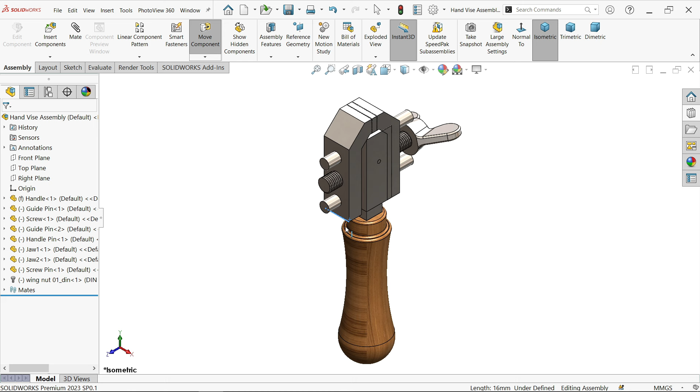Today we are going to create a simple hand vise in SolidWorks. We will create each and every part and assemble at the end. So let's see how to make this simple exercise in SolidWorks. Hand vise assembly, a new exercise in SolidWorks. Here we will create each and every part and assemble at the end.

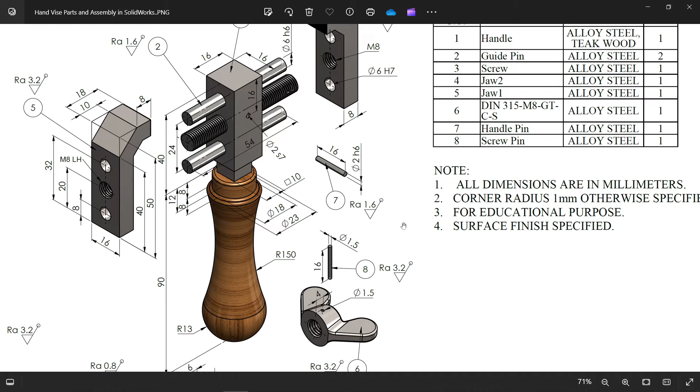Now we have a 3D or isometric view. First let me check: note all dimensions are in millimeter, corner radius 1 millimeter unless otherwise specified. Now check the table. We have 8 parts. Part 1 is alloy steel and teak wood, 1 number. Which one is part 1? This is part 1, the handle.

See the upper part, 16 by 16, and the height here is 40 millimeter. Then at the bottom a 10 square. This depth goes inside up to 12 millimeter. Then there is one hole at the center, 16 millimeter, 2 dia.

Let's make a 6 dia hole here, a 6 dia hole on this one also, and the middle one is a screw, M8. And you will see the distance of the holes from here also, because these jaws are going to clamp with 8, 20, 32 at center.

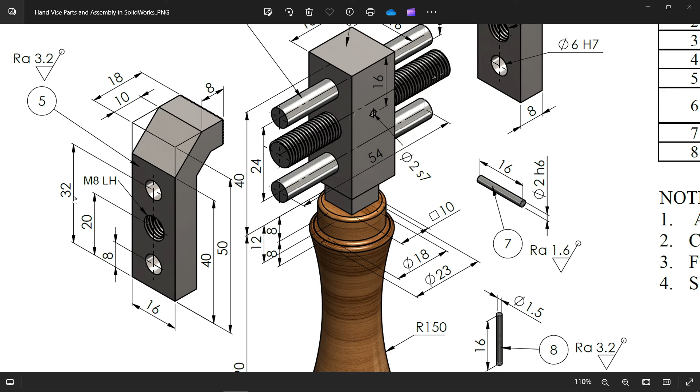So first I am going to create the first part: top plane, sketch. Activate center rectangle and draw 16, tab, 16, enter, right click, exit. Extrude, make the end condition blind and depth 40 millimeter. Make it reverse direction, change direction.

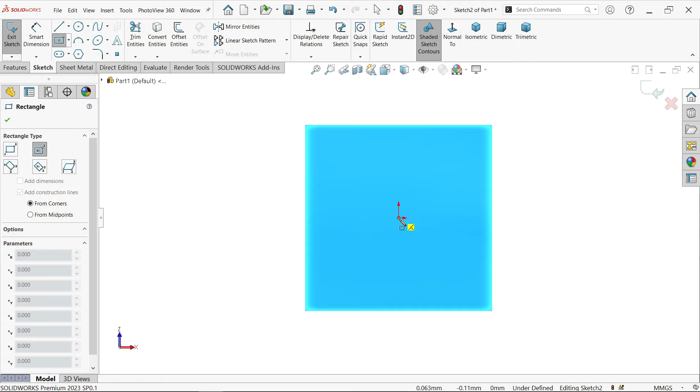Now select the bottom face, sketch, again activate center rectangle. Make 10, tab, 10, enter, right click, exit. This is a fully defined sketch. Go to features and activate extruded boss base. The start condition is the same because this extrudes from one plane. End condition for direction 1 is blind, and depth according to the drawing is 12 millimeter. Here we have 3 holes.

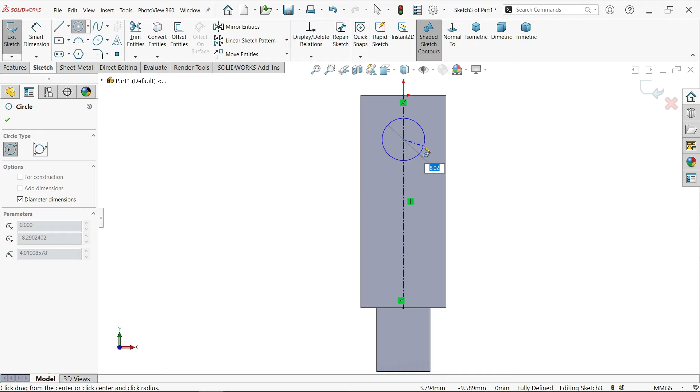Sketch. Let me activate a center line, right click, select and exit. Now let's make the holes. The first hole is going to be 6, and this one is going to be 8, right click, exit.

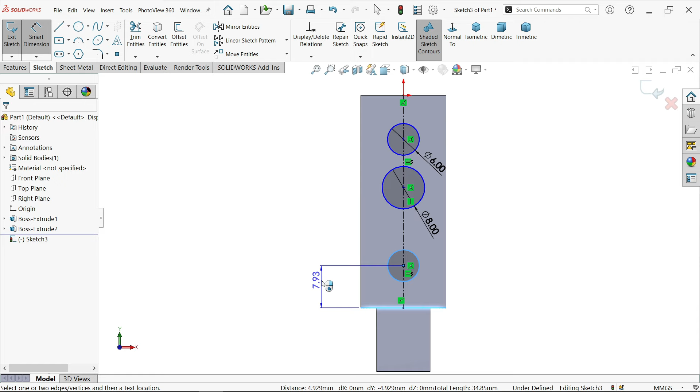Select these two as equal, smart dimension. Let's define one by one from this edge: 8 millimeter, the second one 20 millimeter, and the third one 32 millimeter, as given in the drawing. Select extruded cut, end condition through all, and the arrow points in the right direction.

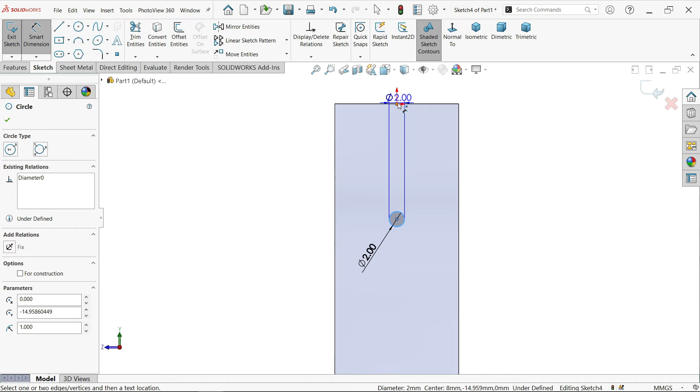Select this face, sketch, and make a 2 dia circle at center, smart dimension, 16 millimeter. I'm going a little fast. This is still not defined, so select the origin point, hold shift and select this center point, and you will see the vertical pop up. Extruded cut, end condition through all, and the arrow points in the right direction.

Now let's make the handle. Handle length is 90 millimeter. This curve is R150, another curve R13, outer diameter 23, inner diameter 18. Overall length 90 millimeter, and from here to here 8 millimeter, and from here to here also 8 millimeter.

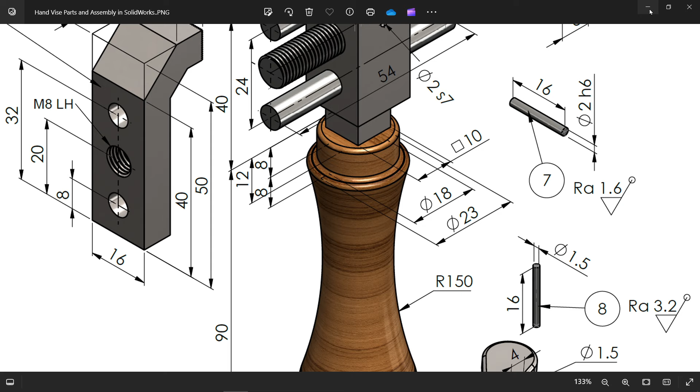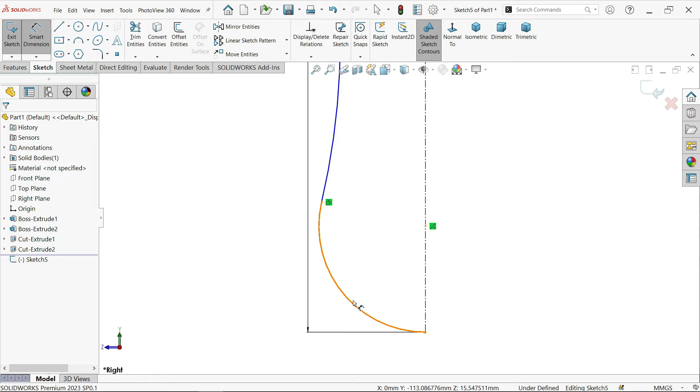Which plane? Right plane. Sketch, start from here and make this line 90, enter, right click, exit. Start somewhere here, exit. Now let's define a 3-point arc, again another 3-point arc, exit. Make this point tangent, smart dimension, this is 13 and this is 150.

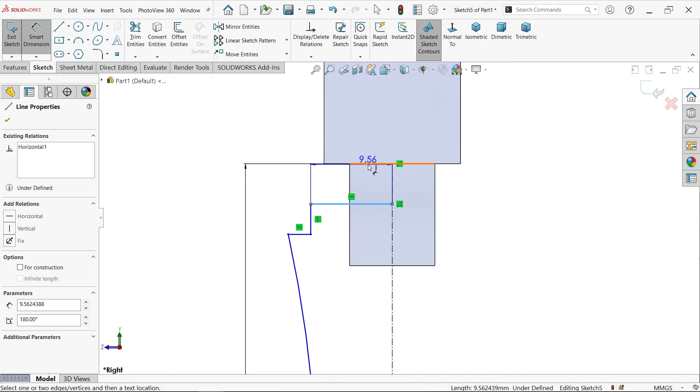Let's check what else we can do. Smart dimension, distance from here to here is 8 millimeter, and again 8 millimeter. The diameter is given as 18 millimeter and this one 23. Now we have a fully defined sketch.

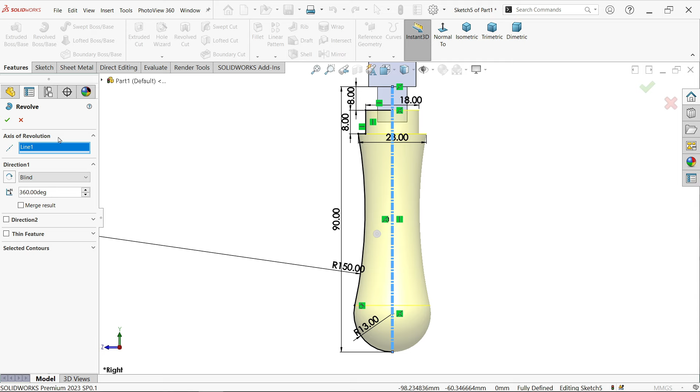Activate revolve boss base. Due to this construction line it is open geometry, so the system asks if the sketch should be closed automatically. Say yes. By default the system took the center line as the axis of revolution, 360 degrees. Unmerge result. Now fillet, constant type, 1 millimeter radius, selecting this face and this edge.

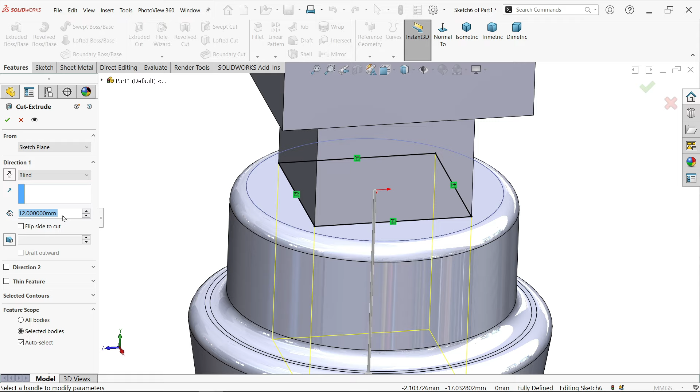Select this face, sketch, extruded boss base, select this one, convert entity. Now I want an extrude cut, not through all, depth only 4 millimeter, because the length is 12 millimeter and from here to this face is 8, so only 4 millimeter remaining.

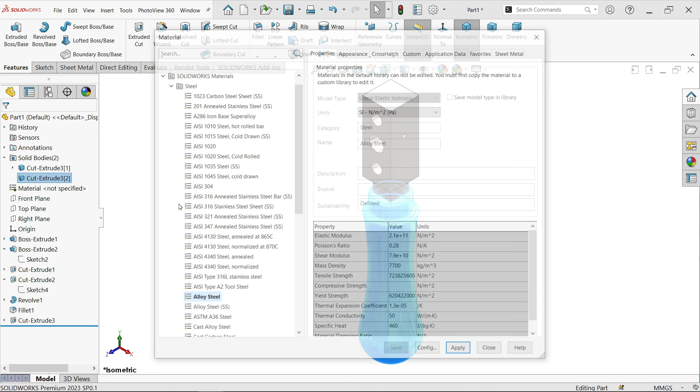Let's hide this part and see. Right click, show. This is the first part: right click, material, edit material, alloy steel, apply, close. The second one: right click, material, edit material, wood, teak, apply, close.

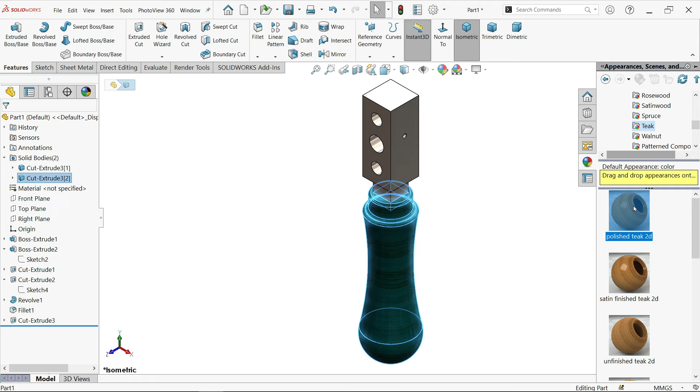You can edit the appearance from here: organic, wood, teak. There are many materials here, you can use polished teak. Now let's save this one. Desktop, save, hand vise. There is already one.

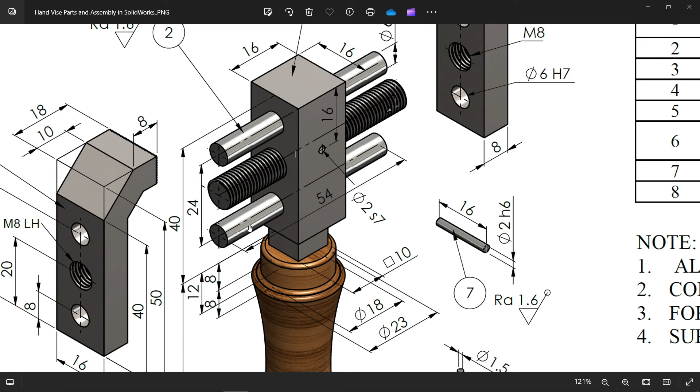This is part 1, handle. Save. Let's make the next part, guide pin, part number 2, and this is the part number 2. There are 2 pins. You will see guide pin, alloy steel, length 54 millimeter, see, diameter 6, fit H6. Okay.

Now front plane sketch, activate circle, 6, enter. Now select this dimension and here in tolerance choose fit. Now this is going to shaft here, so drop down and here choose shaft fitting, F6. Now this decimal, let's say 0. See here, fitting like press fit.

Okay, extrude. Now here make 54, but make it mid plane, so it makes it easy during assembly. Now right click on unspecified material, edit material, alloy steel, apply, close, save. Now this is part 2, guide pin.

Now let's make the third part, screw. Screw we need 1. Now this is the screw, and this screw detail you will observe here. This upper Ra, this is the surface finish. Okay. Now length 60, M8 means outer diameter we will keep M8, but here there is a catch. There is one groove, 2 diameter, then there is one hole at 6 millimeter here. This is machine thread M8 left hand side, and this one only M8 means right hand side. Okay, so these two are different.

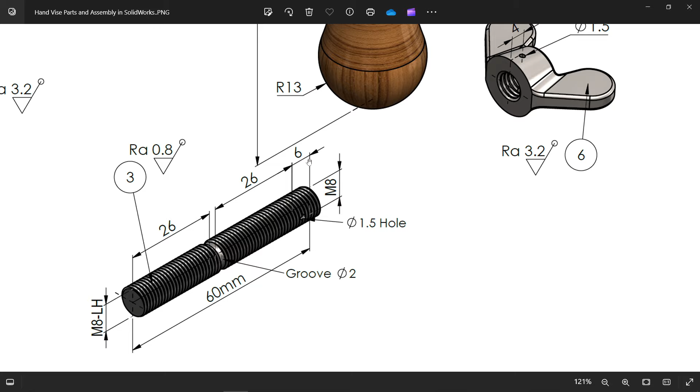So let's do this. This is 26, this center one 2 millimeter groove, then 26 up to hole, then there is a 6 millimeter. Now front plane sketch, circle. Now let's make this one 8, extruded boss base, and make mid plane, and length let's say 60. Okay.

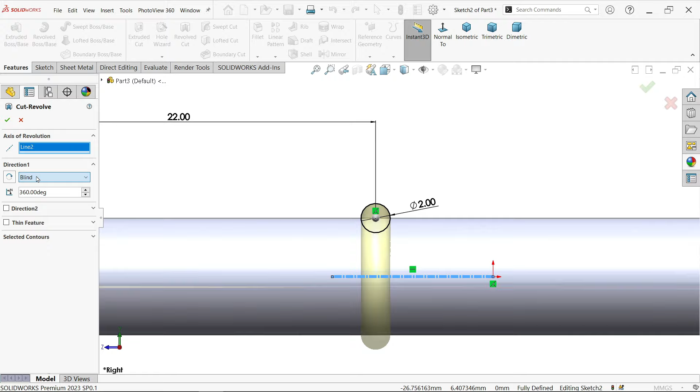Right plane sketch, let me select circle, make this diameter 2, smart dimension 22. Okay. Now select the upper line and this one, coincident. See, activate here revolve cut. Now see, this center line is detected by the system as the axis of revolution. Keep end condition blind and angle 360 degree, because I want to cut the complete 360 degrees.

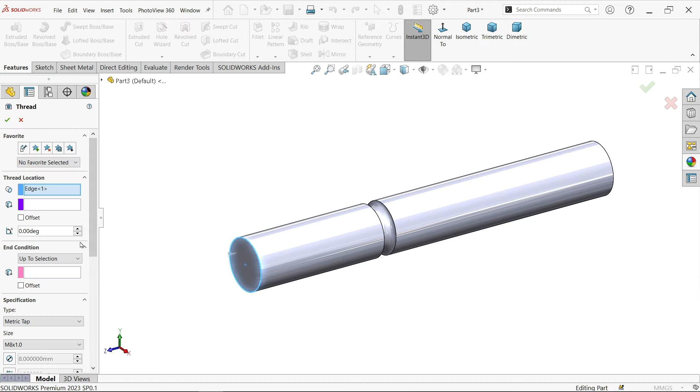See here. Now, okay, the hole we will make later. Let's add here thread. Okay. Now let me select this face, edge and face. The thread is going to start from here. Okay, up to selection. Now up to selection means let's say this edge. Okay, you will see the preview. Now I'm going to use offset, a little, 1 millimeter here, so the edges will be, it seems perfect, but see there is a little outside thread going.

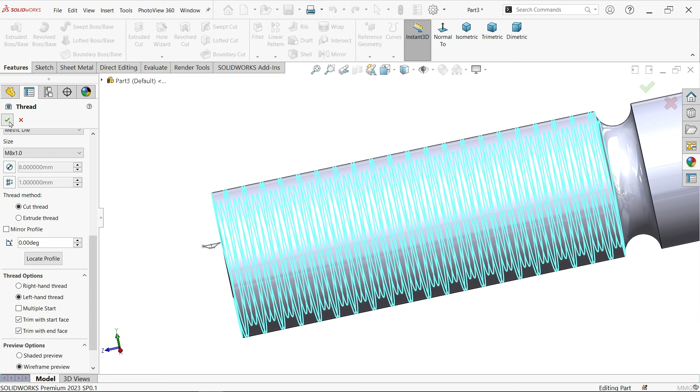Now one more thing, here I want to cut thread, so choose here metric die. See, this is going to cut thread, this side left hand. Okay, now here choose trim with start face, so see, this is trimmed with end face. See here, this is also trimmed. Okay. See. Similarly, I am going to do this for this end thread.

Okay. Edge, let's say this one. Select face. Now up to, I am going to select this edge. Now everything is same. I am going to define offset 1 millimeter. Reverse. Keep a little outside, then trim it. That's the better way. Metric die M8x1. Now this side I am going to make a right hand thread. Trim with start face, trim with end face. Means at the boundary the thread is going to trim. See.

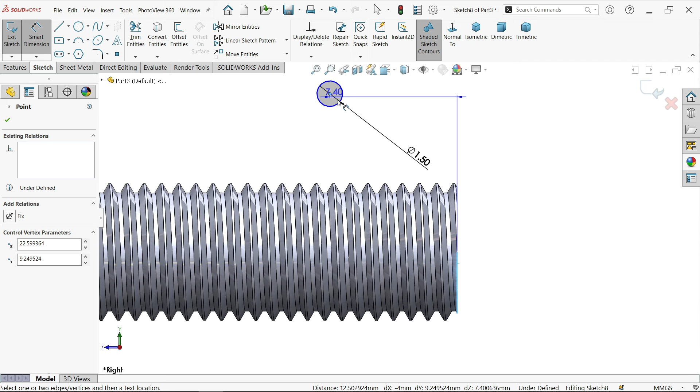Right click, sketch, activate circle, 1.5, enter, exit. Now let me select this edge, 6. Okay. Okay, we need to cut. So select this origin point, hold shift key, select this center point, make horizontal. Look, it seems a fully defined sketch. Now here choose extruded cut, through all, both. Okay. Now see, the hole is created. The pin is going to go here.

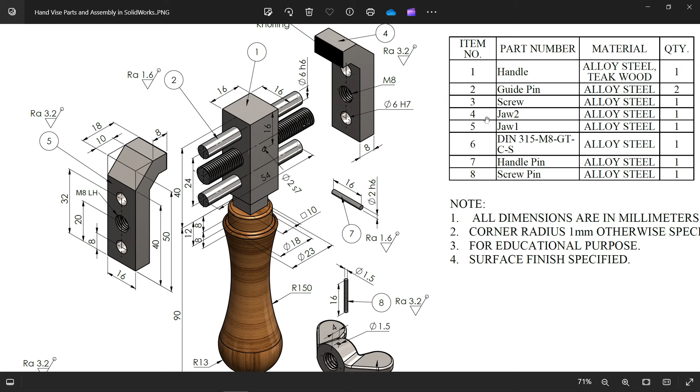Now material, same alloy steel, edit material, apply, close. Third part is screw. Now jaw 2, jaw 1. This is jaw 2, jaw 1. Okay, the hole and everything is same, just we saved it with 2 names. Okay, only difference is in jaw 2. Okay, first we will create jaw 1, then jaw 2.

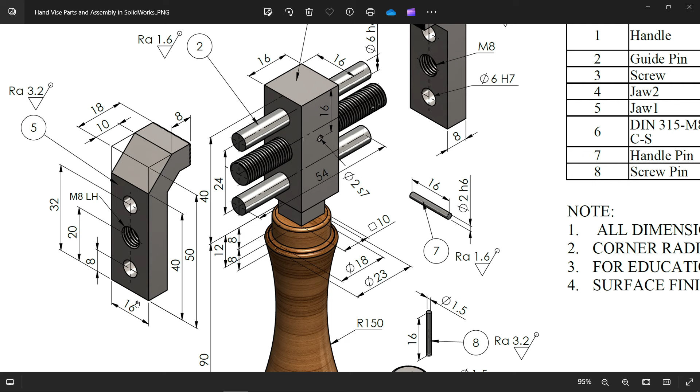8. Overall height you will see 50, 40, 16 millimeter width, 8 millimeter, and depth here you will see 8 millimeter depth. And this side thread is M8, left hand side thread. Then there is a 2 hole. You will see here. Let's do this. And the other side thread is actually M8, left hand thread. Sorry, right hand thread.

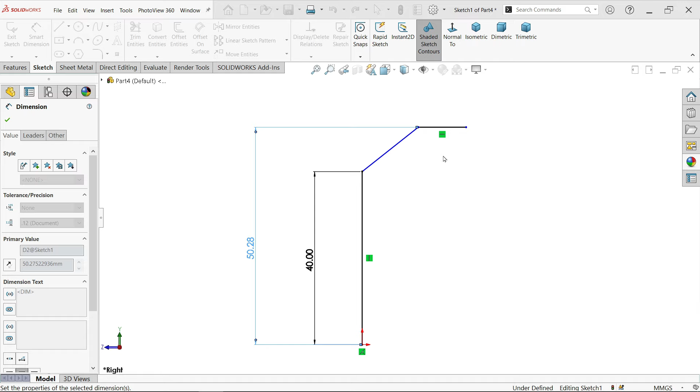So right plane sketch, activate line tool, exit. Smart dimension, this is given 40, 50, 8, and distance from here to here 18. Now simply extrude. Okay, make reverse so that we will understand. Depth or thickness 8. Oh no, this is 16. Now here thin feature 8 millimeter. See.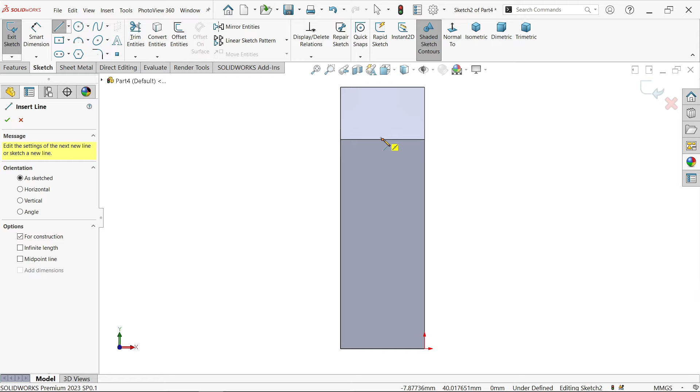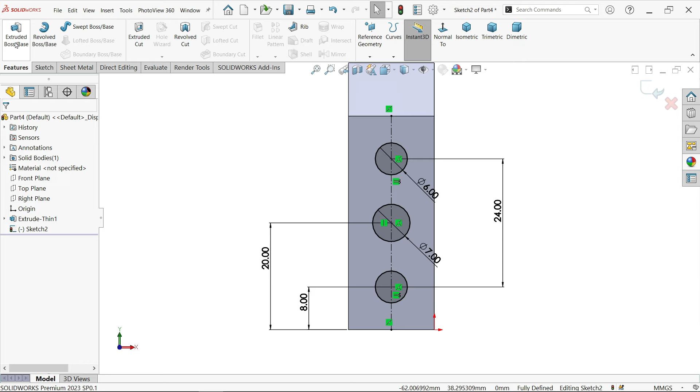Now select this face, sketch. Now here we have to make 3 holes. Six. Then here 7. Because for M8 thread the hole size should be 7 or 6 point something. We are going for 7. Okay. 8. 20. 24. Select these two, equal. Extruded cut. Not extruded boss, but extruded cut. Keep through all. Say OK. See?

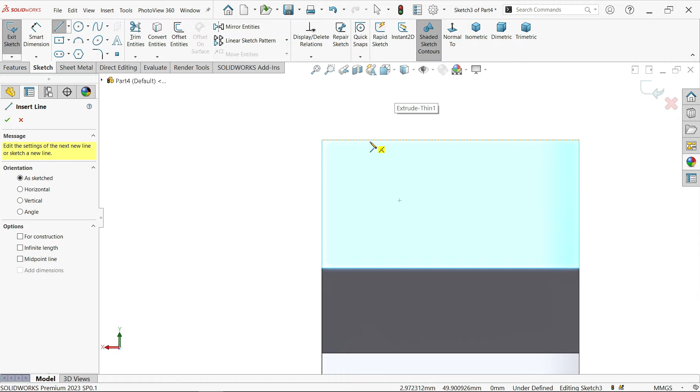Now you will see there is a knurling also. So let's do some knurling also. Select this face, sketch, activate line tool and connect with this. Okay, this is the path, exit, sketch.

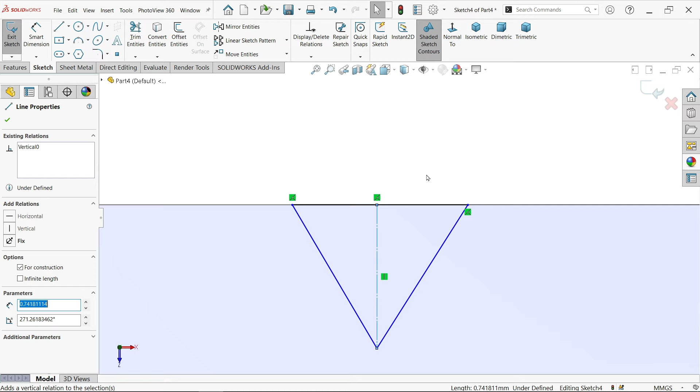Okay, now select this, all edges equal, and let's define, let's say, 0.4. And the previous sketch point and this point coincide. Now see, it seems fully defined.

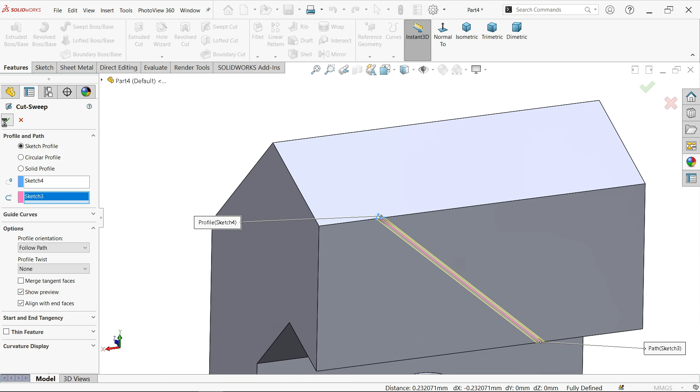Now choose your swept boss base, no, not swept boss base, exit, swept cut. Sketch profile, profile already selected, choose path. Now option follow path or keep normal. We don't need to, let's keep, see. Linear pattern. Let me select this.

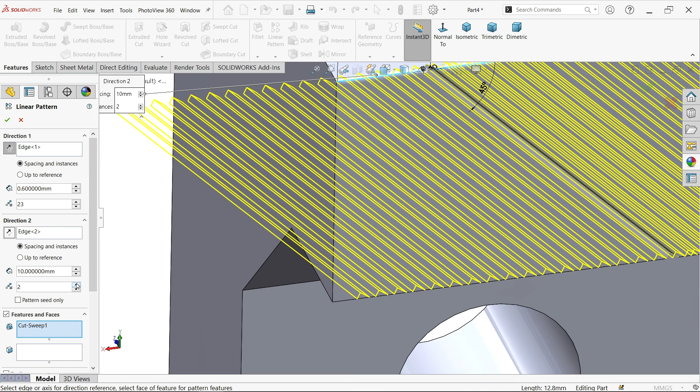Here choose feature and let's make the gap 0.5, or let's make a little, 0.6. Direction 2 also we need to define. So I'm going to define this direction. So there is an increase. The whole thing's going to cover. See.

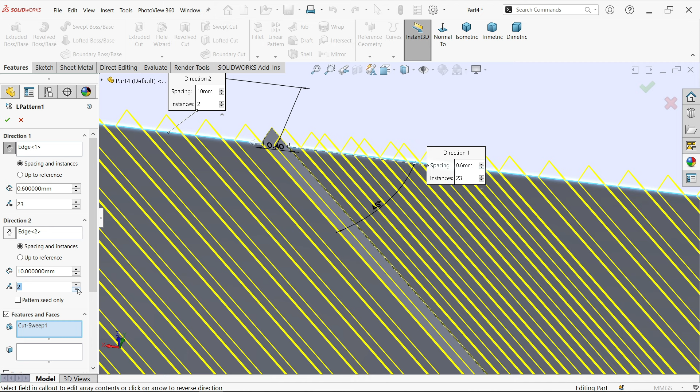Okay, let's edit. Defined only 2. And here defined, forget 0.6. Okay. Yes. Now it seems better.

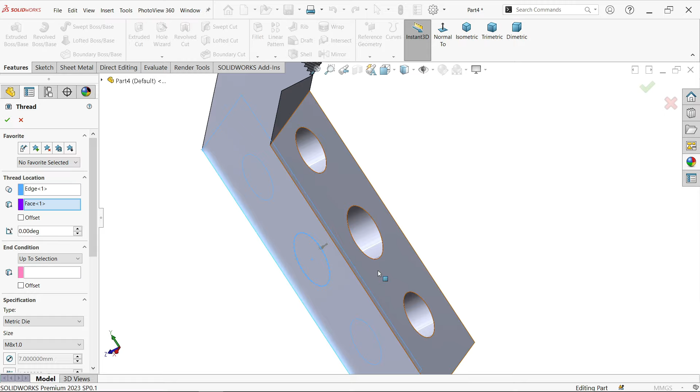Thread. Okay. Let's select this edge. Select this face. Now up to selection. Here. No, not here. Clear. Start up to selection, this face. Now here we need to cut thread. So I am going to choose tap. M8. Okay. Now this side is left hand.

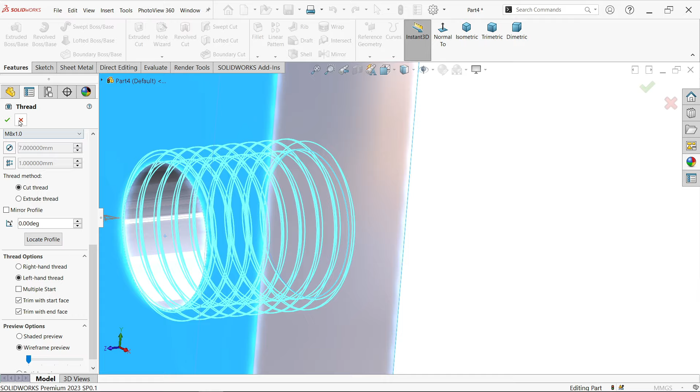Again the same funda I am going to apply here, offset 1 millimeter. You will see both sides a little extra, so trim with start, trim with end. Okay, that's it. Material, alloy steel, apply, close. Now let me save this. This is going to be jaw 1.

Now I'm going to change only the thread. Right click for jaw 2, edit. Now for this I'm going to change to right hand thread. That's it, everything the same. Now this one save as jaw 2.

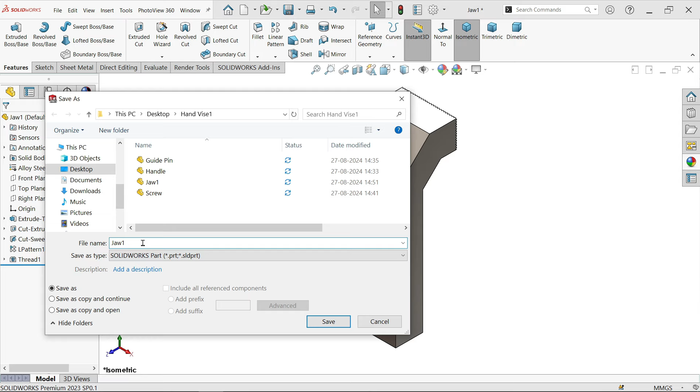Now the next part is DIN. This is a wing nut. See here, there is a hole 1.5, 4 distance from here. This one we will directly take from the toolbox while doing the SolidWorks assembly. So we are not going to draw this one. Then come to handle pin 7. This is the pin, 16 length, 2 diameter. 16 millimeter is length and diameter is 2 millimeter and fit is H6, and this is going to fit here.

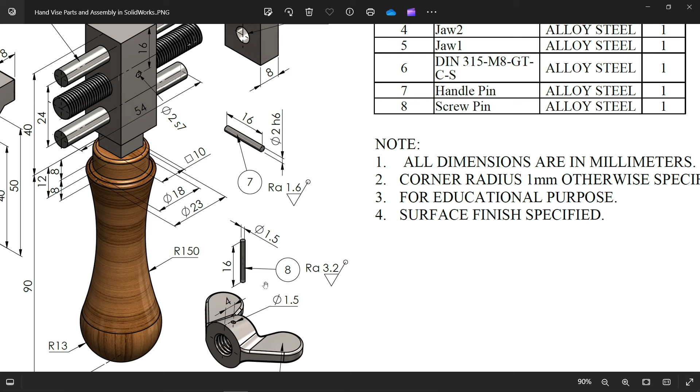Now then there is one more thing, pin number 8, screw pin. This is also length 16 but diameter 1.5. Okay, front plane sketch, activate circle, and here 2. Now select these 2 and here choose fit, press fit. Now shaft is H6, this is going to be H6.

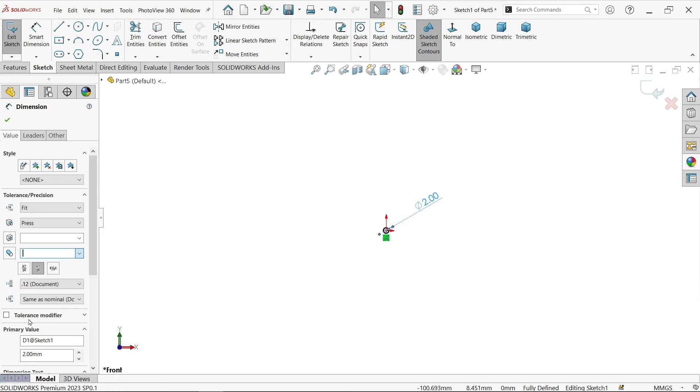Okay, H6 fit, decimal 0. See here, extrude, make length 16 millimeter. Okay, material, alloy steel, apply, close. Now this is going to be handle pin, save.

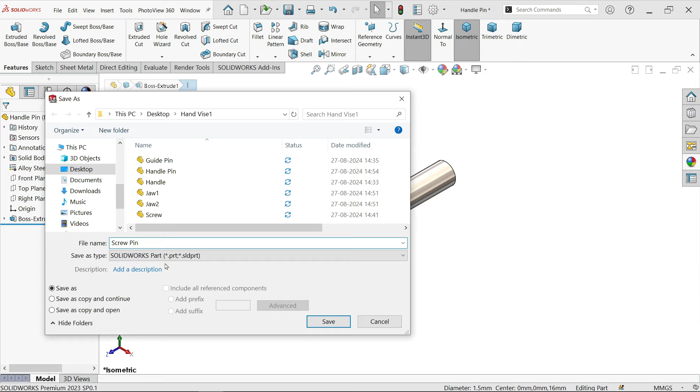Now for the screw pin we will just change this. Click this, we are going to change this to 1.5. Okay, and length is the same. See, let's check diameter 1.5. Save as screw pin. Save.

Now we did all the parts, total 8 parts. The nut we will bring in while doing the assembly. Let's do the assembly for the hand vise. We will fix this guide pin at center. This screw also going to fix, and this is going to screw with this, and this pin is going in. Okay, let's do this one by one.

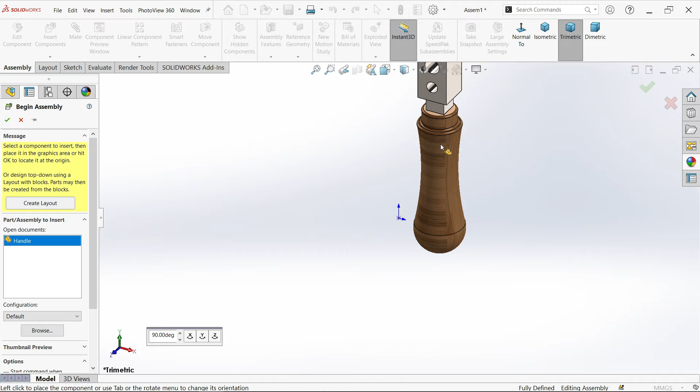New, select here assembly. Okay, now by default first part, let me select. Okay, handle, open. Okay, this is going to be the perfect position. Drop down and here choose origin. Now just move the cursor over the origin and see, this is going to fix with origin. So click, right click. Okay, let me change a little, increase quality, image quality. Now I am going to hide.

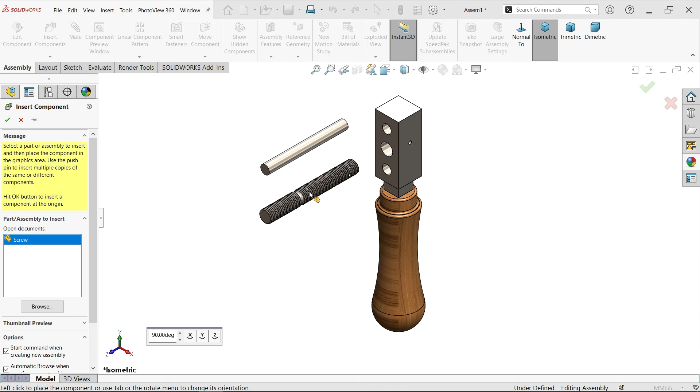Insert component. Now guide pin, control key, screw, open. Now select here, select here. Now press control key, select this one and drag. Fine. Now let's activate mate, standard mate. Now I am going to select this one and the hole. Concentric relation, okay. Similarly do for this. Concentric relation, okay.

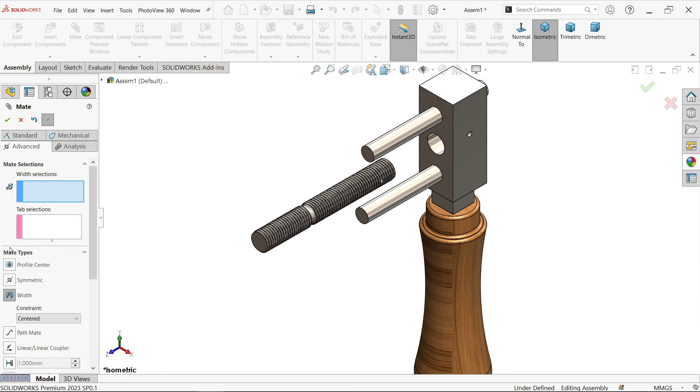Now here go to advanced. Activate width mate, because I want to fix this one at the center of this. So in the first column, select the faces of both ends. In the second column, select the faces of both ends of the handle. And you will see this is going to fix at the center. Say OK. Now let's do similarly for this.

Select this face, this face. Okay, first let me activate width. Now automatically it will shift from here to here. Let me select this face and this face and you will see the preview. Okay.

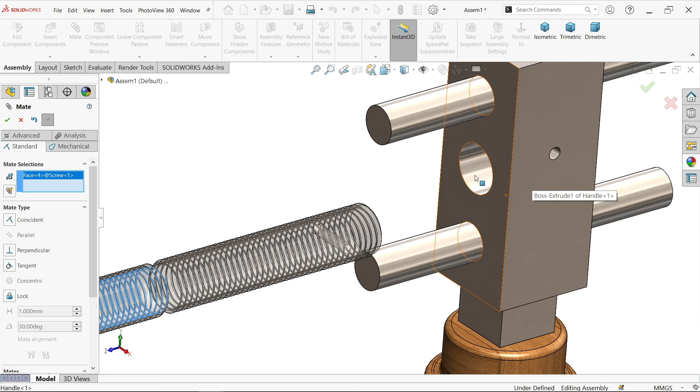Now what else? Go to standard mate. Now select this internal face. Now this face. Don't make tangent. Undo. Drop down here, show temporary axis. Now select this center line and the center line of this hole. Coincident mate. See.

Okay. Now we have to fix this hole and this groove. So let me select this face and this face and here choose distance. Now distance is going to be defined from there. So it's going to be 19. Say OK. Cancel. Hide temporary axis and let me select right plane, sketch.

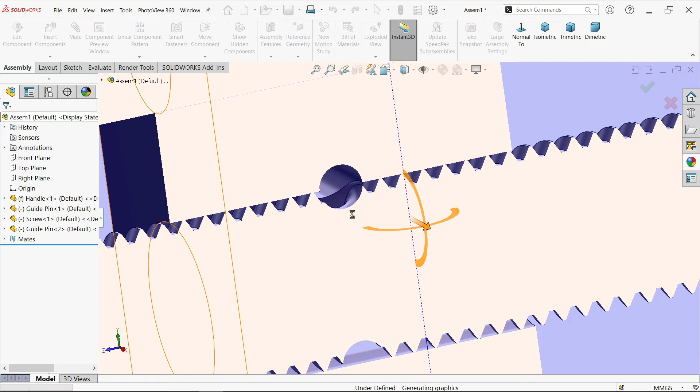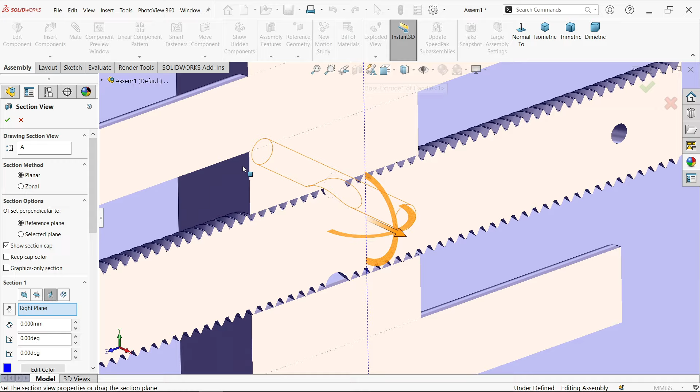Exit. Now let's fix the pin here. Handle pin. Now let's rotate this. So what axis? Y axis. Click and this is going to rotate. Now I am going to select mate. Select this hole, concentric relation. Okay. Now the length of pin and this width of this body or handle is same. So select this face and this face. Okay. Let's check section view and see.

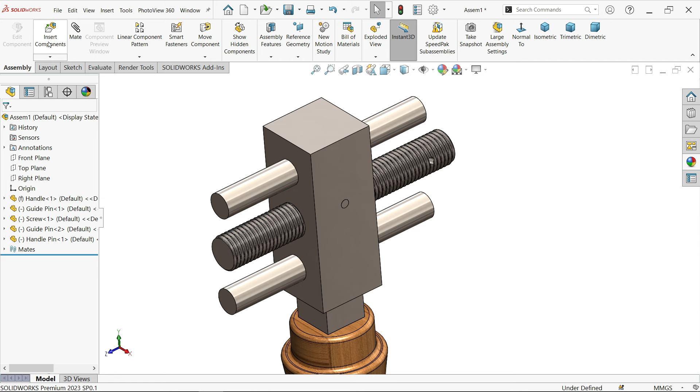Let's bring the jaw. Jaw 1, jaw 2. Open. Okay, this is going to jaw 1. Jaw 2 we have to rotate. Which axis? Let's say Y. Again one more time. Okay, that's fine. Click and place. Smart dimension. Let's click mate. Select this one and this pin. Okay. Similarly, this pin and this. Similarly, do for this, concentric mate. Let's this hole and this pin, concentric mate.

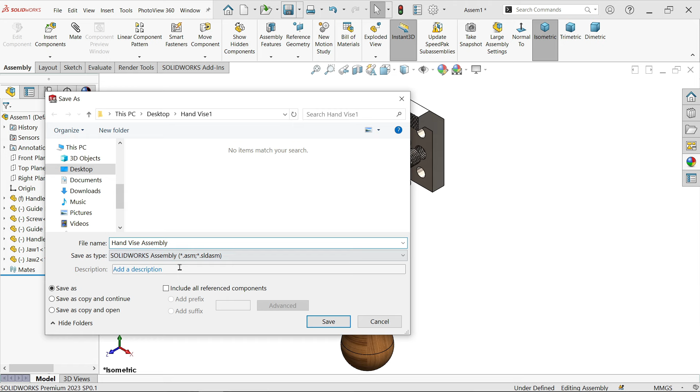Now, before going to lose anything, let me save this one. Hand vise assembly. Now here let's create some screw thread. Before going to create some screw thread, I'm going to make some relation here, temporary relation. Select this face, coincident. Okay. Similarly, let me choose this face, coincident. Okay, this is temporary.

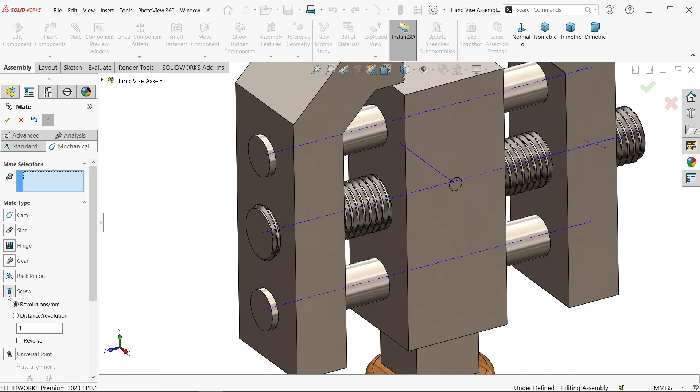Okay, let's apply some screw relation. Now activate here temporary axis. Go to mechanical. Now here I am going to choose first this one. Now this is the axis of jaw 1. Now this is the screw axis. 1 revolution per mm, because our pitch is 1 mm. Reverse direction. Okay. Now let's do the similarly for this end.

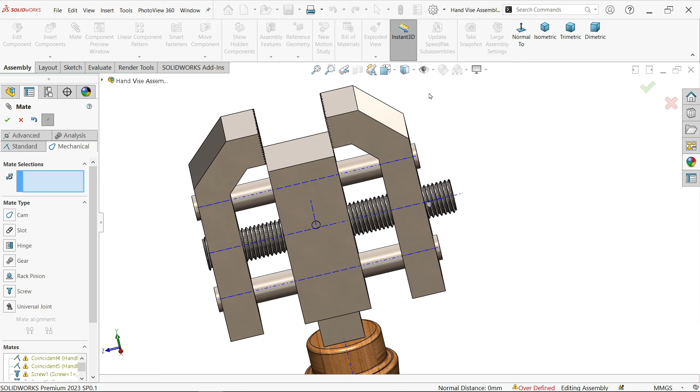Select this one. See here axis of screw 1. Now. Okay. Axis of jaw 2. See? Screw. But here make sure uncheck the reverse, because this side is left thread, this side is right thread. So both move together. Say OK. Cancel. Let me hide this. Suppress. Okay. Now let's try.

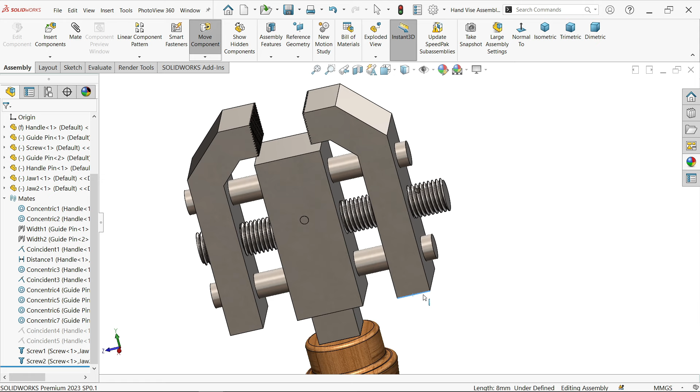See, both is moving reverse. See, both moving opposite direction just because left and right thread. This is not going to close completely, but that's, see. Now let's save this one.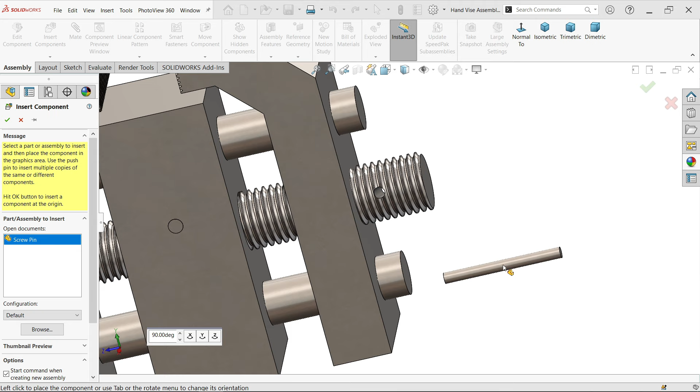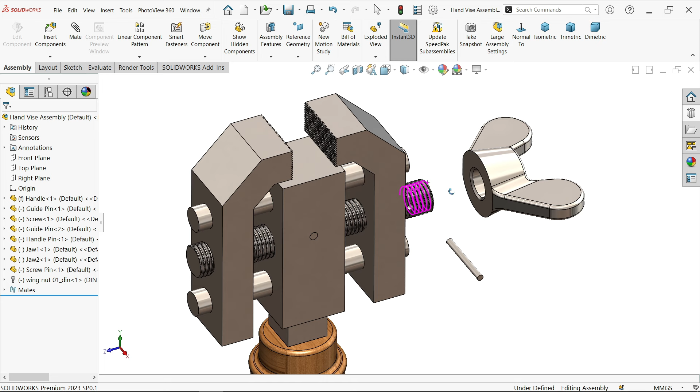Insert component. Now what? There is a screw pin 1.5. Okay, just Y direction, something like this. Now I want to go to toolbar, add-ins. Now here go to DIN, nut, go to miscellaneous, and here we have wing nut DIN 315. Just drag it here. Now, okay, this is going to be M8. That's fine. Cancel. Now we need to make a hole here.

Open. Okay. Plane 2, sketch, circle. Make sure you're just above the origin. 1.5, enter. Now I am going to make this hole distance, actually in drawing is 4 mm, but here I am going to make a little less, because this should be going to attach 2 millimeter. Extruded cut. Select through all both. Okay. Make image quality higher. See, this is too low. That's why the shape does not look so good.

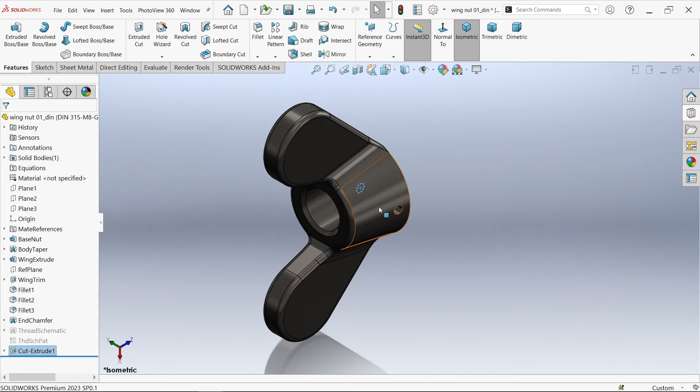Let me save this. Save as. Now go to desktop and vise. Now this is the name. Save. Cancel. Would you like to rebuild the assembly? Say yes. Okay. Let's go to mate. Select this one and this one. Concentric mate. Okay.

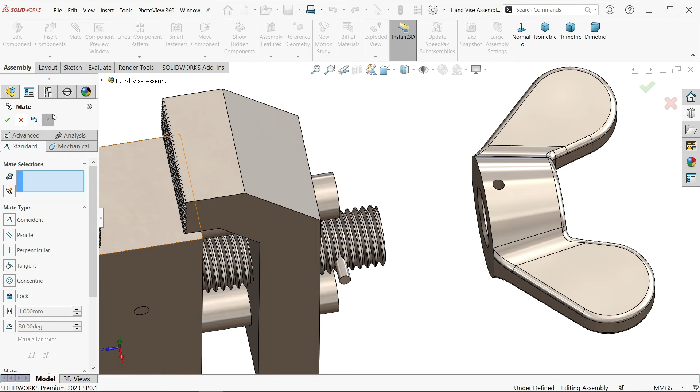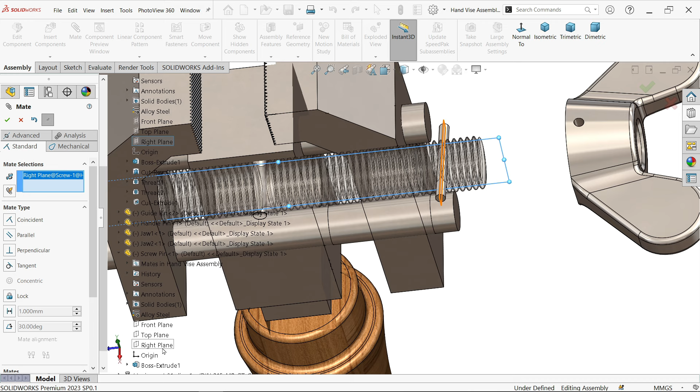Now let me drop down the screw. Screw plane, let's say right plane, and just find out screw pin. Press Control key. Okay, we forgot to do here. Open screw, click open screw, extruded boss base, make this one mid plane. See, cancel, yes, yes.

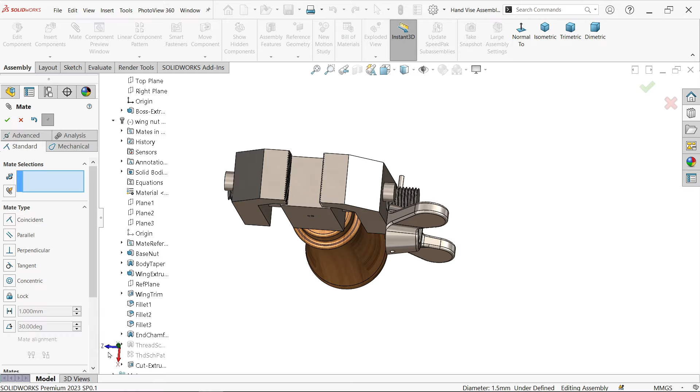Now let me select right plane. Now front plane, press Control key, front plane, mate. Now you will see this is going to fit exactly at center. Fine. Okay. Again mate. Select this one and this hole. Concentric relation. Now let me drop down the wing nut. Let's check. Okay, this is exactly the wing nut, screw, front.

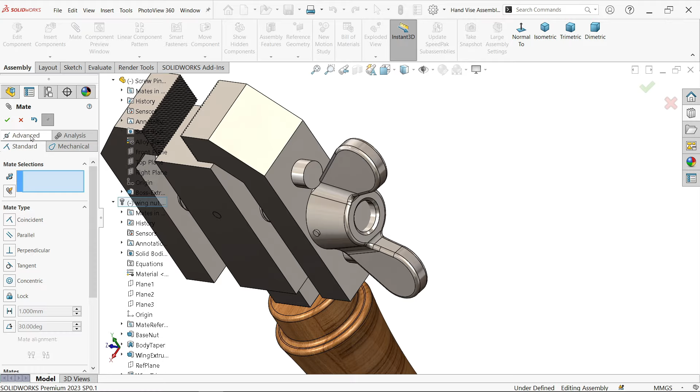Okay, cancel. See, okay, this is exactly fixed, something like this. So mate, select this one and this one, parallel, fine. Let's try again. Oh, that's it. Even though you can make relation, but that's what we did. Choose the normal. I think we did. Now let me save this one.

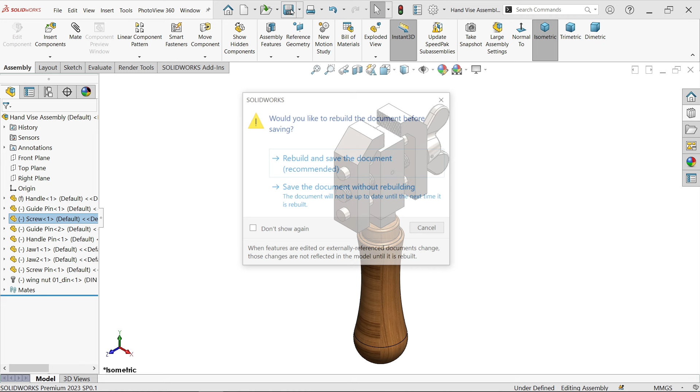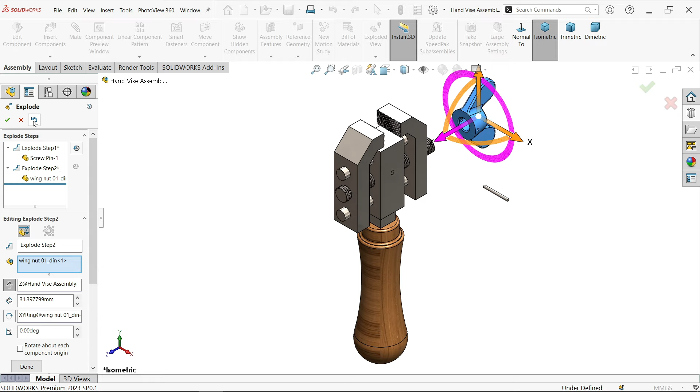Now let's explode. First let's drag pin. Done here. Select this one. Drag here. Undo. Done. Select this, drag here parallel to our pin. Done. Not handle, I want to choose only pin. Done.

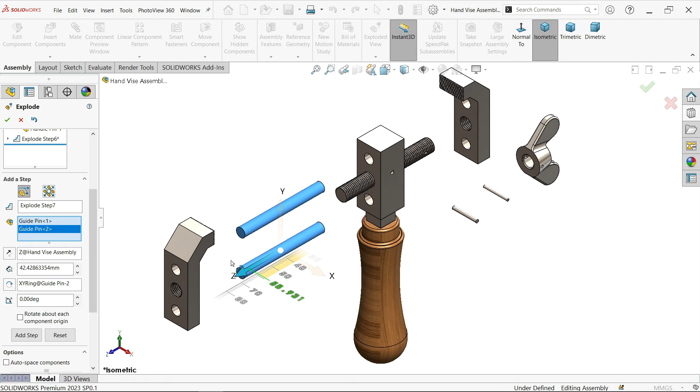Now select both pins. Done. Let me make a little down. Done. Say OK. Now right click on assembly, choose here collapse, save. Now let's save this one.

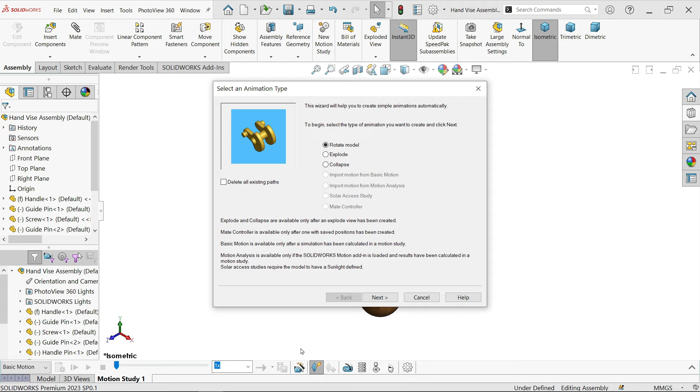Motion manager. Now here choose basic motion, 50 frames per second. Explode. Next, 9 minute, better to choose 6 minute. Start 0, finish. Again choose collapse. Next, start 6 minute. Oh, sorry, 6 minute and start 6 minute. Finish. Calculate.